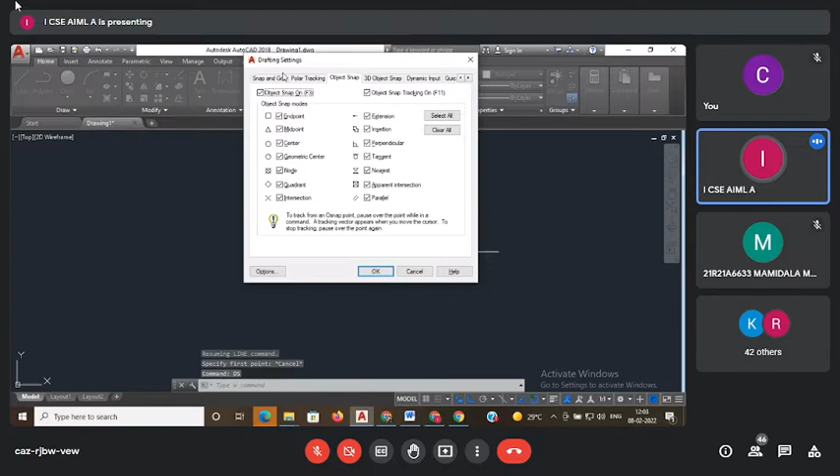ఎంతమంది వచ్చారు? 45 44 మెంబర్స్. ప్రీవియస్ క్లాస్లో ఎంతమంది ఉన్నారు? ఉన్నారా 60?

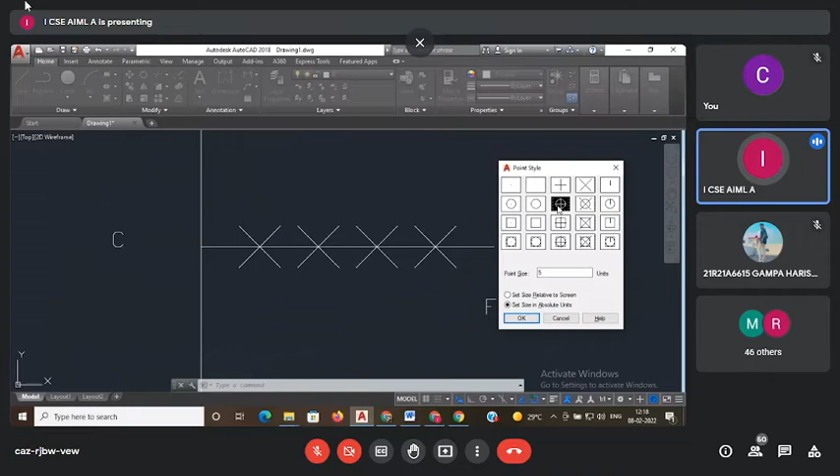Automatically changed. Okay, now I will reduce the size. PD size, enter, I will give 1.

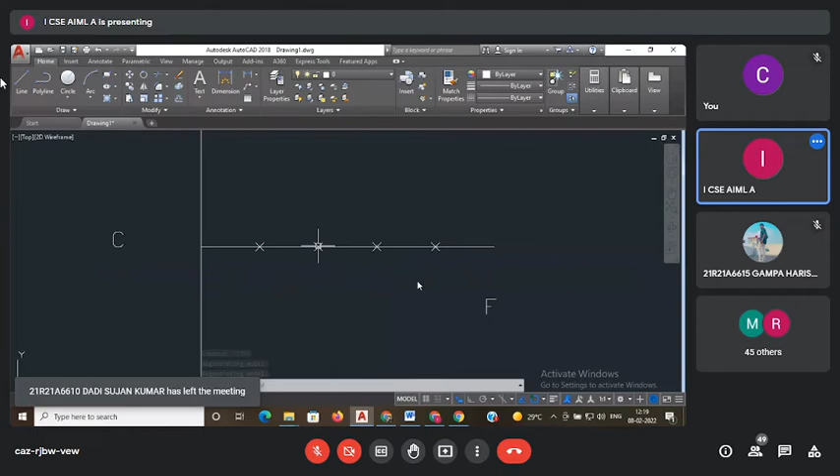Next, P type, go to P type, you go with the cross. Now, if you observe here, you are getting only 4 points: 1, 2, 3, 4. This is also 5, meaning the fifth one is the end point. That's why it won't show any line over here, meaning point, but you have to consider that also.

How do you divide the line into a number of segments? By using the divide command. Select the divide command and select the line which you want to make divisions on, and then give the number of segments based on the eccentricity value.

Then up to this, for ellipse, parabola, hyperbola, everything is the same. Suppose if it is hyperbola or parabola, they won't give any eccentricity value. It's a half, meaning this total is 50, you will get only 1 point at the middle. Okay, so I am doing the same question for the parabola.

What is the eccentricity value for the parabola? Equal to 1, meaning 2 halves. I will go here to the divide command, I will use the divide command. Select the line, and I will go to number of segments. How many segments? Only 2 segments, suppose, 2 points.

PD mode, enter, give value 3. We already had this previously, that's why it is showing like that. Okay, draw one horizontal line, vertical line and horizontal line, use that method.

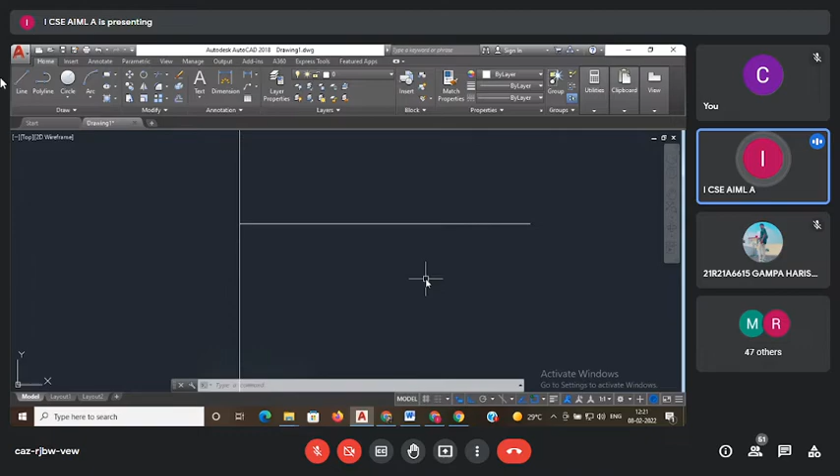Now I want to make it 2 divisions. Why? Because it's a parabola. If it is hyperbola, see here, the eccentricity value is 3 by 2, okay, or 5 by 2. 3 by 2 means again 5 divisions.

You have to go with 5 divisions. But where you have to keep the vertex value, vertex point, that is the main step here. First I will go for divide. Select the line, go for number of segments 5, enter.

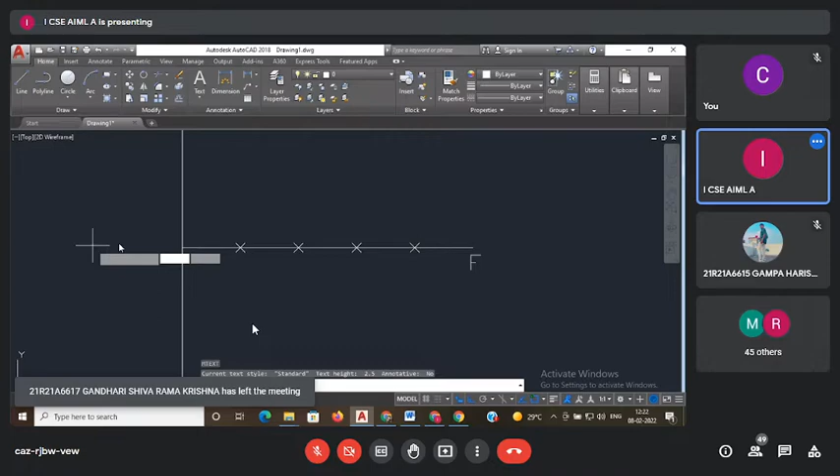Okay, next vertex point. Suppose here I am having F. Okay, here I am having C. This is A. It is B.

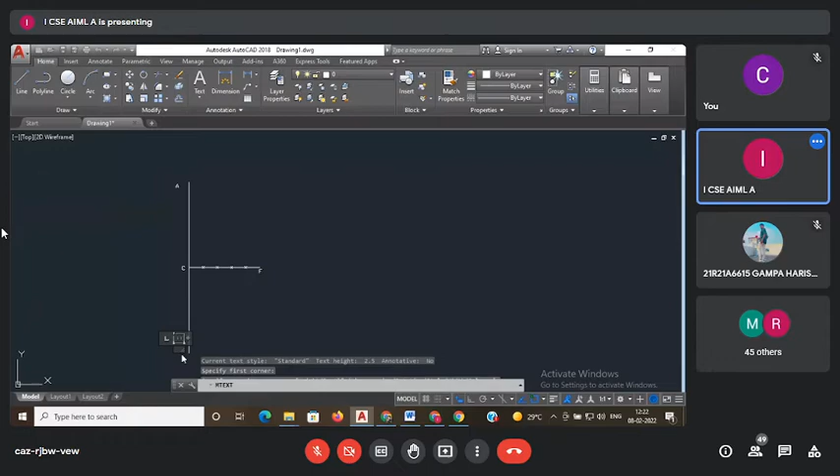Next, I have to make the vertex point here. Suppose if it is ellipse, the value is 2 by 3. Meaning, as I already told you, the formula: eccentricity E is equal to Vf by Vc equal to 2 by 3.

Okay, already I explained that in the class. So here eccentricity E is equal to, now here they have given 2 by 3, nothing but Vf by Vc. Vf by Vc. Okay, already you know the F point, you have to identify the V point. Already you know the C point, and you have to identify the vertex point.

VF means from F, from the focus. How many divisions? 2 divisions. That's why don't forget this. Don't forget this formula, this is the main point, the main key point in our entire diagram. If you miss it, suppose instead of 2 by 3, if you take 3 by 2, it will become hyperbola.

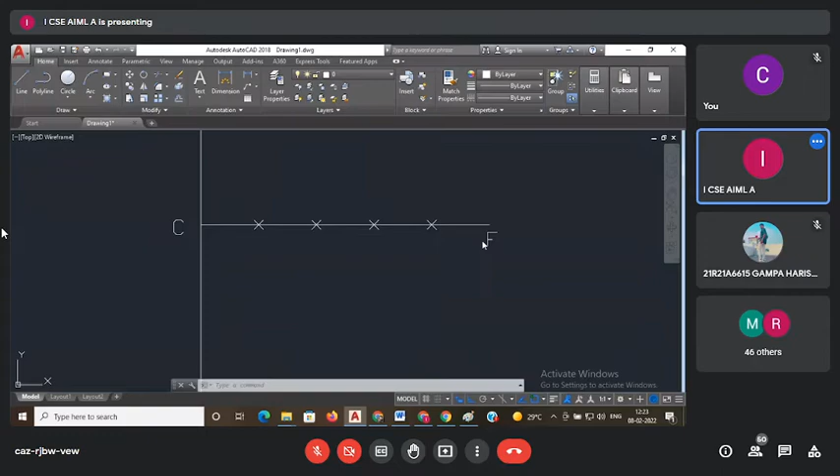Okay, now 2 divisions from the vertex, sorry, from the focus. From the focus, 2 divisions, 1 and 2. Here I am having the vertex point. This is my vertex, okay.

Then suppose if it is hyperbola, you have to take 3 by 2. Meaning 3 means VF. From the F, vertex points are 3 divisions. From F you have to take 1, 2, 3, somewhere here. This is the vertex for the hyperbola.

Now this is an ellipse, that's why 2 by 3. 2 divisions from the focus. 2 by 3, VF by VC. From the F, V has 2 divisions. That's why we have taken 2 divisions.

Okay, then if you made any mistake here, you can easily identify by observing the vertex. Suppose whenever the vertex point is moving towards the directrix, you will get the open curve. Open curve meaning rectangular hyperbola, parabola, ellipse and circle in reverse direction. That's why whenever the vertex is moving towards the focus, you will get a reverse direction: first circle, next ellipse, next parabola, hyperbola, rectangular hyperbola, like that you will get.

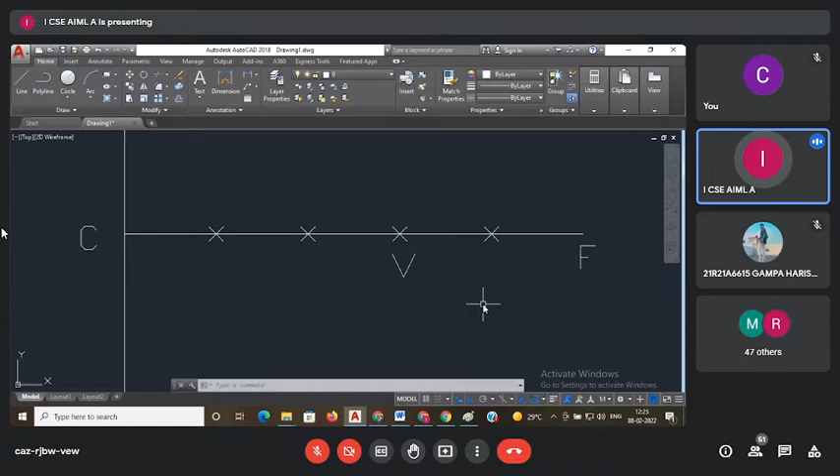That's why by seeing this vertex point location, you can easily identify whether the vertex is towards F or towards the directrix. Suppose if it is towards the directrix, you have to remember only one point: whenever this vertex point moves towards the directrix, you will get the open curve. Just remember this point, that's it.

Okay, now the vertex point is more than half distance towards the F, that's why you will get ellipse or circle. Suppose if the vertex is somewhere here at the middle, you will get exactly parabola. If it is moving towards the directrix, you will get hyperbola, rectangular hyperbola. That's why don't confuse here.

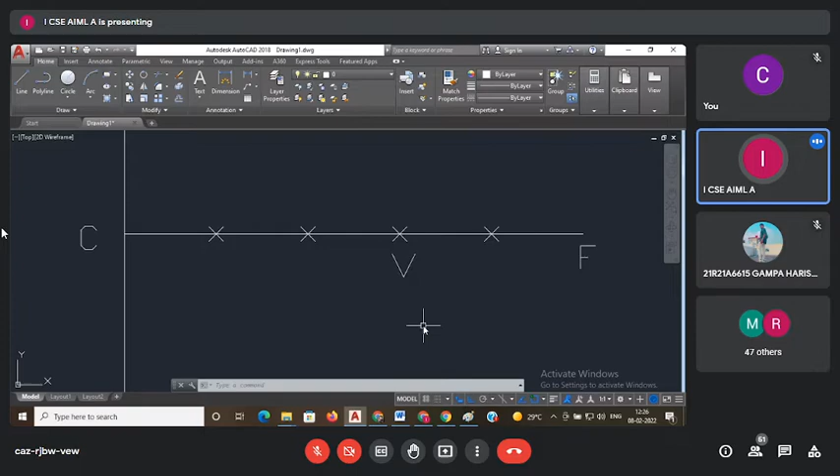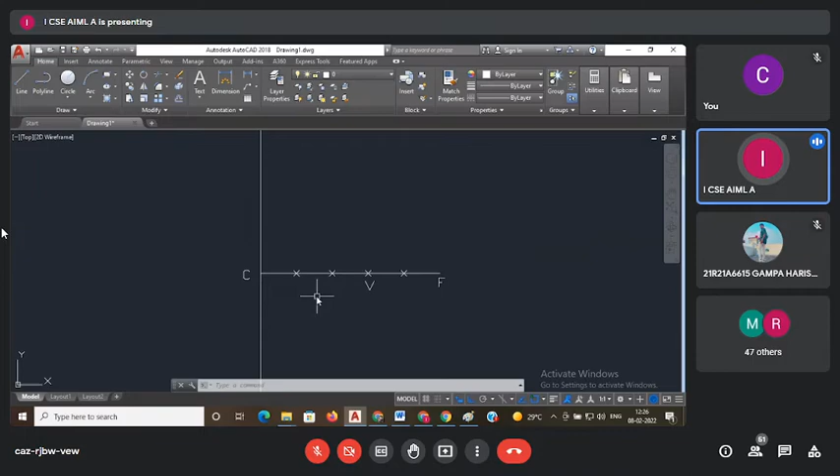Whenever you are mentioning this vertex point, after mentioning it, observe, just go with 2 seconds, that's it. Within 2 seconds you can judge whether the vertex point is near to the F or near to the directrix. Whenever it is near to the directrix, like you will get a vertical line. Directrix, how is it? Vertical line, meaning you will get an open curve. Towards the F, you will get a closed curve.

Okay, now vertex we have shown. After this vertex point, I am explaining here the general method. You can apply this method, these steps, for any kind of problem in ellipse, parabola and hyperbola. Suppose they have given 70 mm or 80 mm or 40 mm, whatever it is. But I have taken, for example, 50 mm and I am doing it. Instead of 50 mm, they may give 70 or 35 or 40, whatever it is.

Okay, next, after finding the vertex point, we have two methods: one is the arc method, one is the circle method.

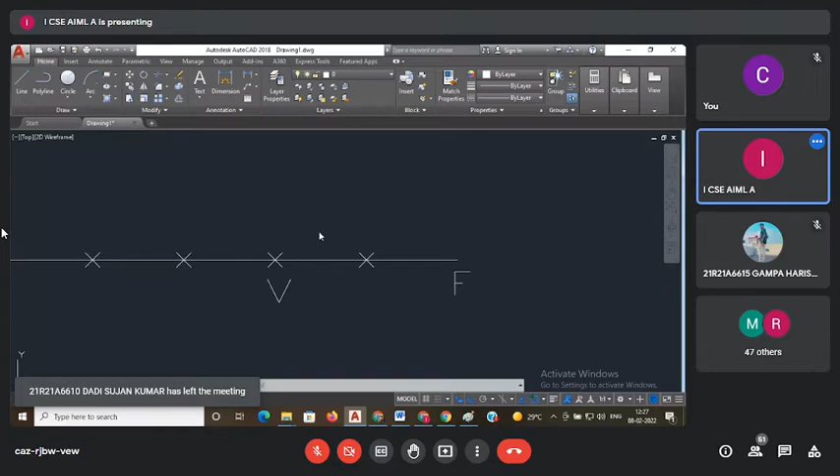First arc method: select the center, start, end. V as a center, VF as a radius, draw one arc. That's one method.

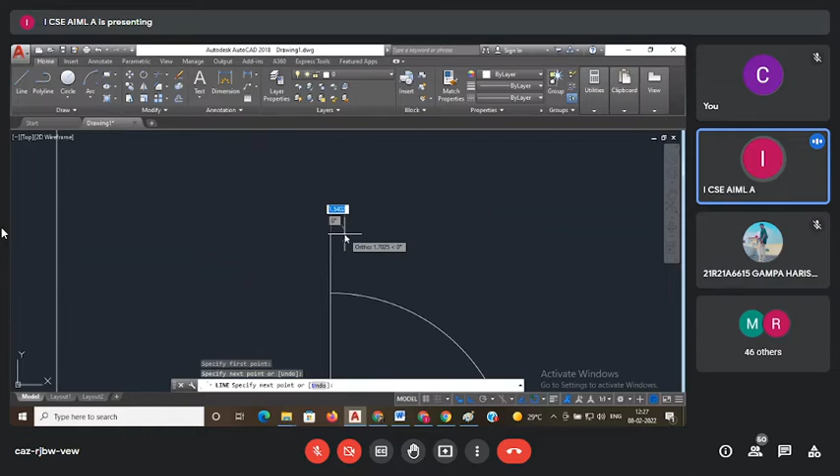Before that, you have to draw a vertical line from the vertex. After finding the vertex, draw the vertical line upward. Then draw an arc with V as center, VF as radius. I observed in the lab that you were drawing the vertical line but not taking the VF radius correctly.

You are taking half of the radius, means 25 mm, or sometimes drawing from V to the second point distance. Don't confuse here. Just follow the steps: after finding the vertex, draw the vertical line upward, then with V as center and VF as radius, draw the arc that will intersect or touch this vertical line.

That intersection is your E point - E, F, B, C, whatever notation you choose. You will get one point. That is the arc method.

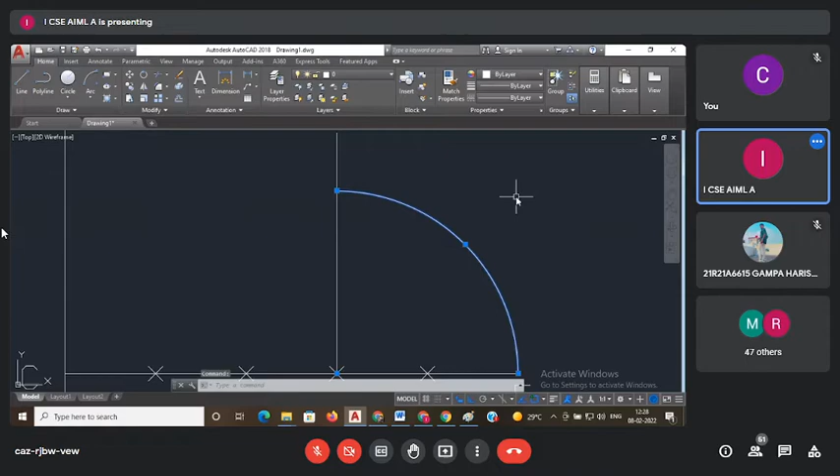Instead of the arc, I can go with the circle method, which is easier. I will select center and radius - V as center, VF as radius - and draw the circle. It will intersect this line. Then I will use the trim command and erase the extra part.

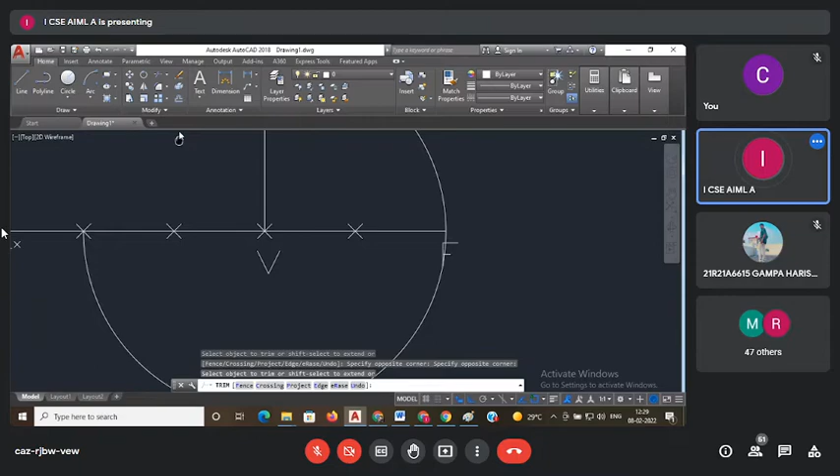This is also one method. But instead of trimming, which requires using one more command, I will directly use the arc method. Draw a vertical line from the vertex, take V as center, VF as radius, and draw an arc. You will get one point here, that is E.

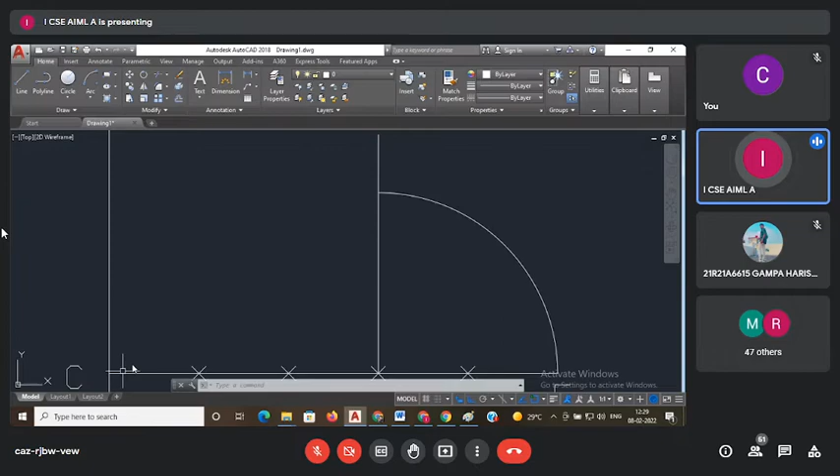From E to C, draw one continuous line - ortho from C to E. You have to draw this line.

Don't measure this angle, no need to measure it. Whenever you draw this inclined line, you can guess by its inclination whether you're going to draw an ellipse, parabola, or hyperbola. Suppose this inclination is increased, like this.

The line will be somewhere here, vertex here, VF is the distance. Whenever the line inclination increases, you automatically get an open curve - you can guess this from the inclination. But don't measure the angle. Just draw the line from C to E. This is your E point.

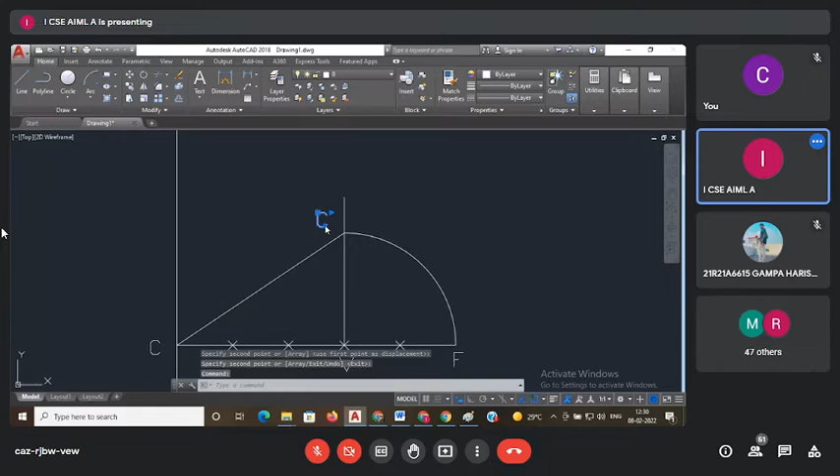Then I want to extend this line. Instead of other methods, select this line, keep your cursor at the end position, and you will get an option called lengthen - without pressing any button on keyboard or mouse, just placing the cursor at the end point. Select lengthen and increase the length up to somewhere here.

We have one more step here, that's why we just lengthen it at this point. Suppose if you're not doing it that way, you could just measure the angle and extend. Instead, select this line and move your cursor to the end point - automatically you'll get two options, one being lengthen. Select lengthen and increase the length, that's it.

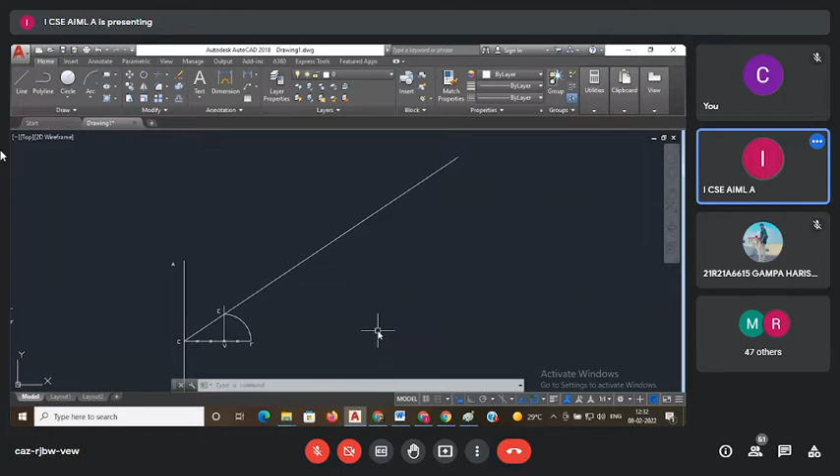Next, I want to draw a 45 degree inclined line from the focus, from F. This is the same mistake many of you made in the practical classes - even when I explained this on the projector, some students took the line from V, the vertex, instead. It's not like that - always from the focus point F, you have to draw the 45 degree inclined line.

This is applicable only for the ellipse case. For the parabola and hyperbola, there's no need to draw this 45 degree inclination line. Why? Tell me anyone - why don't we use this 45 degree inclination method for parabola and hyperbola? Because they give an open curve, so there's no need to find the second vertex.

Why are we drawing this 45 degree line? To identify or find out the second vertex point. Because ellipse is a closed curve, you can draw a rough line and divide that line into 12 or 15 equal parts, and roughly draw the arc.

But if you want exact dimensions, exact end points of the ellipse, first the starting point is here, vertex 1, this is V1. Now V2 means you have to find out the second vertex.

For that purpose only, we are drawing this 45 degree line. Because ellipse is a closed curve, while parabola and hyperbola are open curves. That's why there's no need to follow this for them, just take the number of divisions.

Now I will draw one more line from the focus with a 45 degree inclined line. I will select this F point, move the cursor like this, and take some length. Now it is showing 273 something, okay, keep it, no problem.

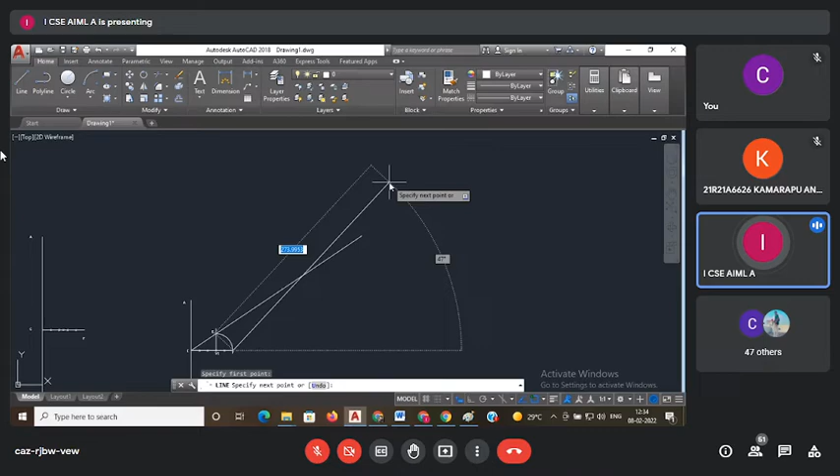Then I want to give the 45 degree inclination. Just press the tab button, don't give any value, just press tab and give the inclination, 45 degrees. Okay, done.

Now I got the intersection point. From this intersection point, I want to draw one vertical line. Between this vertical line and this axis line, from F, draw one line up to here. Then you can trim the excess portion.

Once again, draw the 45 degree inclined line from the focus. Observe clearly, from the focus, not from the vertex. That 45 degree inclined line intersects the CE line somewhere. From that intersection point, you have to draw the vertical line.

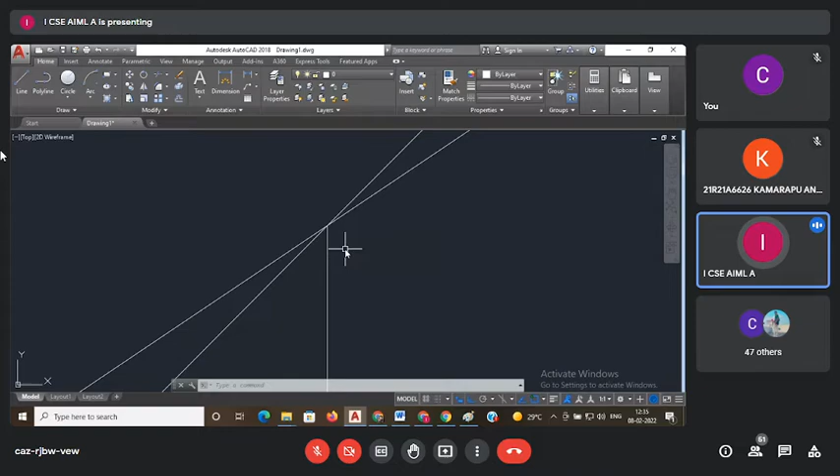You have to be careful whenever selecting the intersection point. Zoom the screen and then select the intersection point, otherwise sometimes it will select somewhere else. Find out the intersection point correctly, then draw the vertical line towards the axis.

Now this is your V2, copy here, this is your V2. Now change this notation to V2. Between this V1 and V2, you will get the ellipse.

Next, what is the next step? You have to divide this F and V2, or V1 and V2. Tell me, which line do I want to divide? V1 to V2 or F to V2? Not F to V2, V1 to V2. Why? Because we will get the ellipse between V1 to V2. That's why we have to divide the V1 V2 line only, not F to V2.

Don't forget, if you divide F to V2, you will still get an ellipse, no problem, but a very small size ellipse, not the original size. Why? Because you are missing this length, the V1 to F length you are missing, that's why you will get the small ellipse.

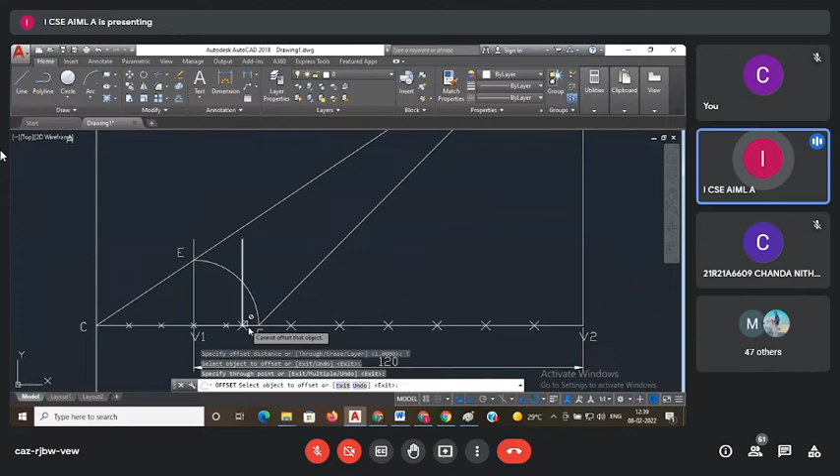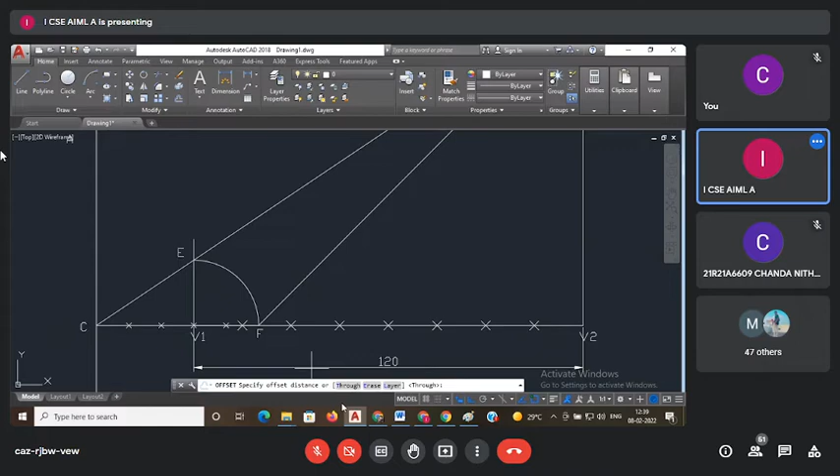One more method we have here is multiple. Go to offset, through, select the through command. After that don't select the line, we have options here. Offset, through — after selecting through, let's select the line. Then you will get the option once again here, multiple. On the command prompt, select multiple. Then place the point: first line, second line, third line.

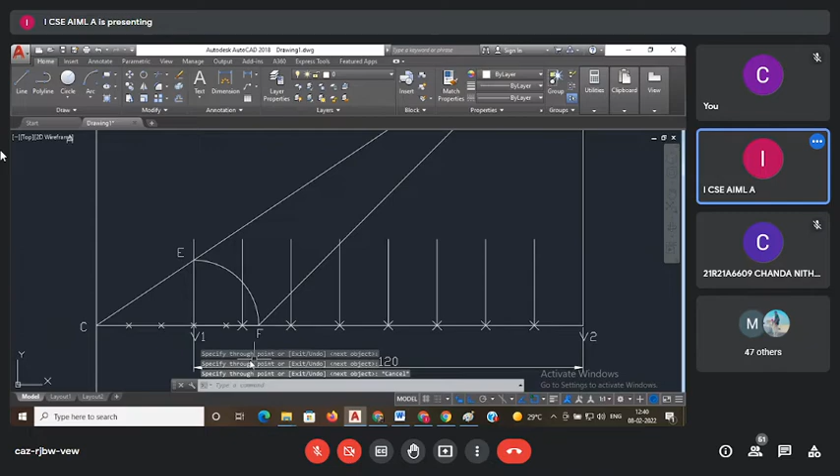But suppose if you find out the distance from point to point, also no problem, you can draw like that also. Now we draw the vertical lines from each division. Now this is your...

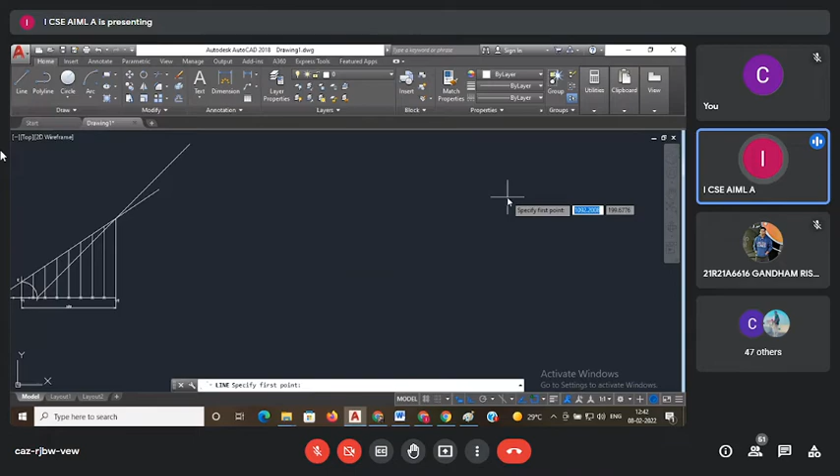Suppose here one line I am having, a vertical line, and here I am having one more horizontal line. If I want to extend this line up to this vertical line, suppose I am drawing one more line somewhere here, I want to extend this line up to this vertical line. Whenever I want to extend it means it should intersect with the boundary line. Suppose I am selecting here extend command — extend, I am selecting the boundary line first, meaning up to where I want to extend, boundary line, press enter. Whenever I move the cursor, automatically it will extend.

But if I move the cursor onto the second line, it won't extend. Why? Because here I don't have the boundary line. Meaning whenever you want to extend the line, it should touch the boundary line. After extending, it should touch the boundary line, then only it will extend. Otherwise it won't extend. This is the extend command.

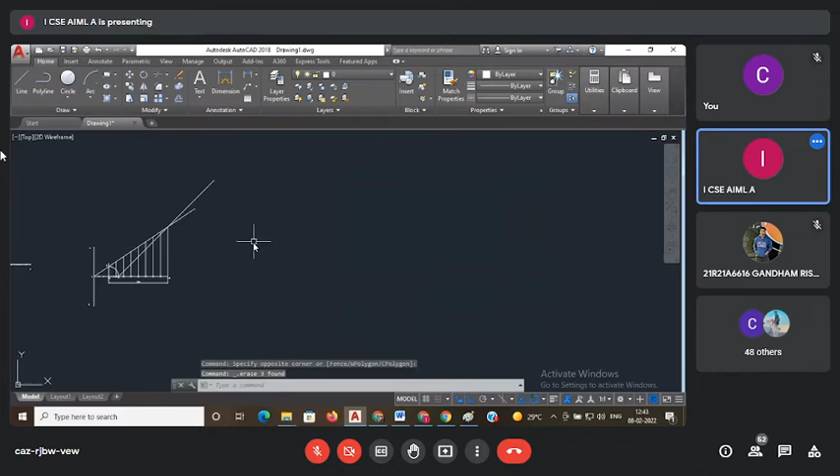Here same, I am using the extend command. I am using this CE as my boundary line. Then I am selecting all the lines. Now this point is 1, 1 dash, 2, 2 dash, 3, 3 dash, 4, 4 dash, like that.

Go for multiple text, take it, single text here. Here is 1, here is 1 dash. Here is 2 dash, 3 dash, here is 3, here is 2. See — 1, 1 dash, 2, 2 dash, 3, 3 dash.

What is the next step? After drawing this, I will go with the circle method or arc method. So first I will explain the arc method, then the circle method. Arc method: center, start, end. First you have to measure the length — this 1, 1 dash length you have to measure.

Before going to select the arc method, you have to identify the length of 1, 1 dash. How much is it? 30. So I will go with the arc method: center, start, end. Center will always be fixed — center is our F, F as a center. Zoom it, F as a center. Then 1, 1 dash as a radius.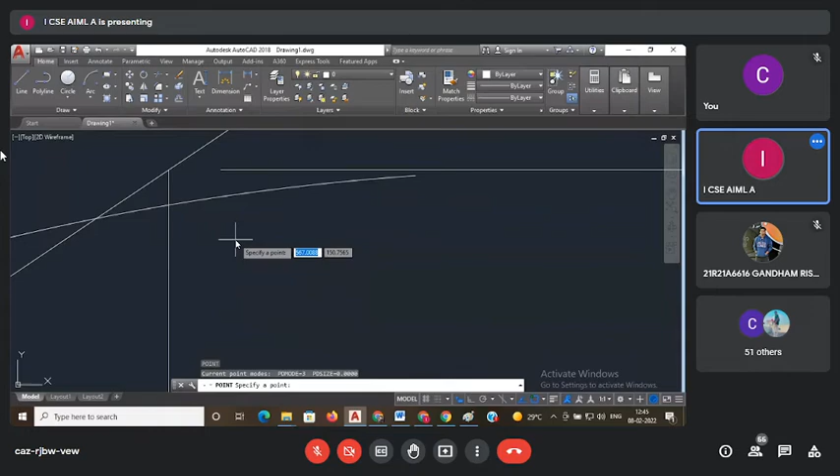Make the point and delete this arc. Or you can keep the arc, no problem. This is the arc method. If you want to select the arc method, you have to measure each and every distance.

Distance means 1, 1-dash distance, 2, 2-dash distance, we can say length, 3, 3-dash length, 2, 2-dash length, 1, 1-dash length, like that. Up to the 8th division, you have to measure the length.

Instead of that, if you go with the circle method, it's very easy. Go with circle and radius method, center and radius method. Now the center is 1, radius is 1-dash. Okay, then I will select the circle.

I will go with the movement. I will shift this center from 1 to F. Now see, exactly I am getting the point. Here already I drew the point. Exactly I am getting the point. Then again, no need to measure the 2, 2-dash length.

Just I will shift this center from F to 2. But what is our procedure? 2, 2-dash as a center. But now it is 1, 1-dash center. Increase this radius up to 2-dash.

Now again change the center from 2 to again F. Now it will intersect somewhere here. Make the point. Okay, next, again shift the center from F to 3. Now it is the third point. Then increase the radius to 3-dash.

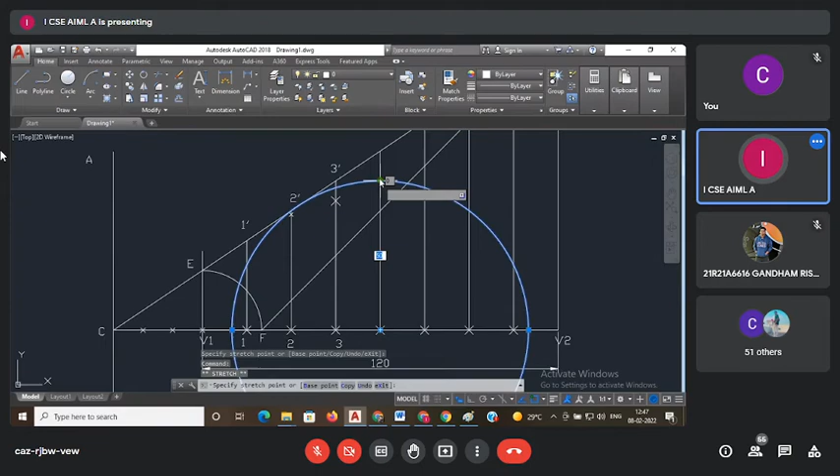Okay, next again shift this center from F to 4. Now increase the size to 4-dash. Next shift the center from 4 to F. Okay, where it is intersecting somewhere here, 4 and 5.

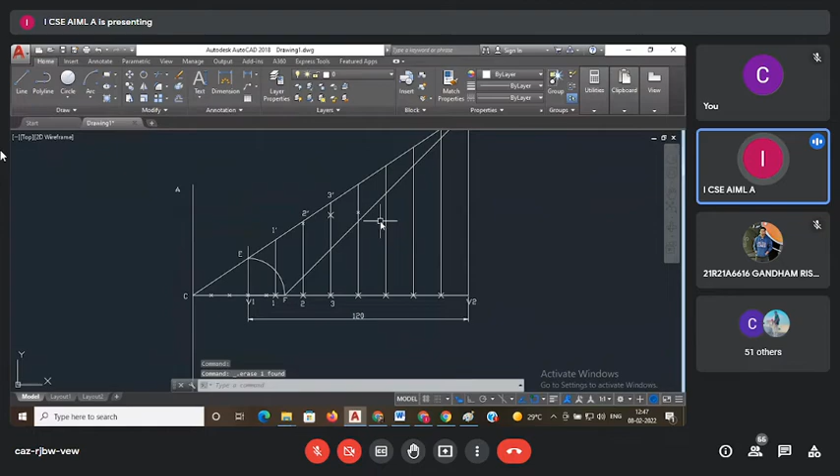Next, why I made it into 8 equal parts - that's why I don't want to measure the 5-dash, 6-dash, 7-dash. Why? Because it's automatically opposite to this half. That's why, up to the 4th point, I will measure it.

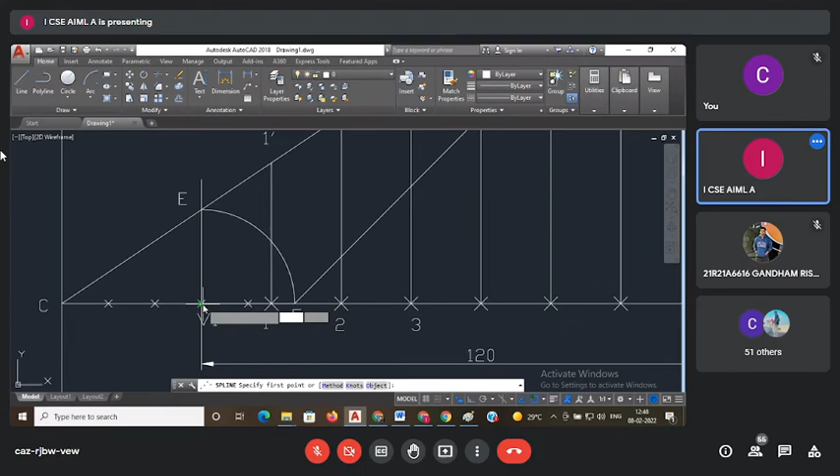Then I will go with a spline curve. Drawing tools, first option, spline fit. Select the spline fit. Start from where? From the vertex, not from the focus. From the vertex. That's why I told you the ellipse starts from V1, ends with V2. I'm starting the curve from V1.

Where is the first point? This is your P1. Next, where is P2? This is your P2. Next, this is your P3. This is your P4. I am keeping the cursor like this and enter. Now I have only 4 curves.

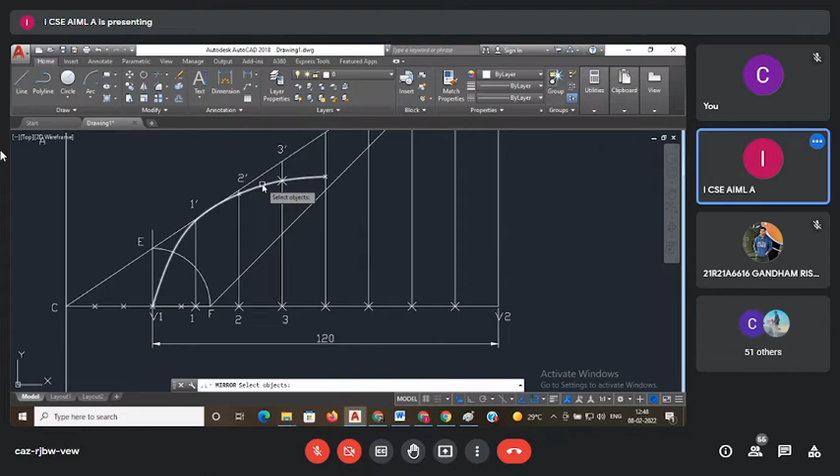Now I will go with the mirror command. Select the mirror command. Select the object, arc, enter, starting point and ending point. Now you got half of the curve. Join these two.

Join. Then if it is not joined, no problem. Select these two, sometimes the options won't work. Select these two and go for mirror again. Select the first point, V1 and V2. Now this is your ellipse.

This is your ellipse. That's why just you have to draw up to 4 lines. Why? Because total 8 divisions we have 4 lines.

Suppose if you take 10 divisions, up to 5 lines, then you can use this arc. You can go for the mirror. Again you can use this total half of the circle, half of the ellipse, and you can complete the total ellipse.

Now you have to show 3 dimensions. One is length from C to F, 50 mm, next one is V1 to V2 distance, and third one is tangent and normal. Tangent and normal.

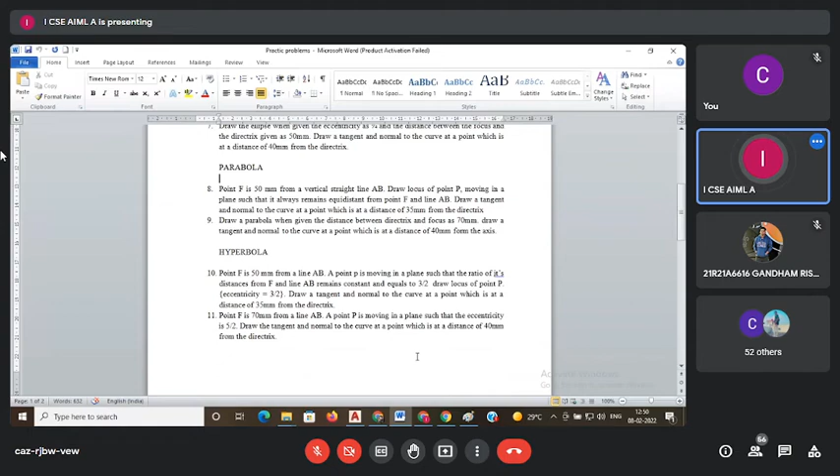How to draw the tangent and normal? Already they have given some values here. For the tangent and normal, they have given 35 mm from the directrix. 35 mm from the directrix means take the distance from C, ortho on 35 mm. Draw one vertical line.

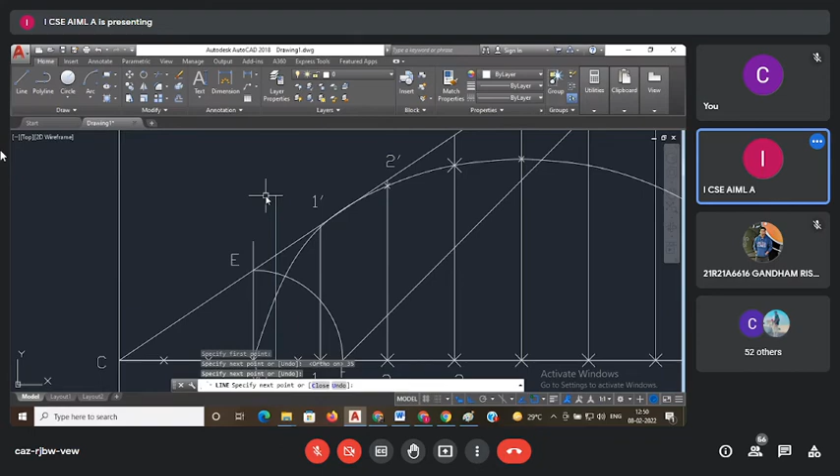Where it is intersecting the ellipse, somewhere here - this is your P point. After that, what you have to do? From P to F you have to join one line. This is your P point. P to F, you have to draw one line.

Then from P to F, after drawing the line, you have to draw the 90 degrees line for this PF. For that, you can use the rotation command, or line also you can use. Select the rotation option.

Select the object, press enter. Specify the base point, go for copy option and give 90. If it is given 90, I think you will get upward direction. Now it is, suppose I will give first 90. Okay, I got downward direction. Then I will extend, meaning lengthen. Just move your cursor here and keep somewhere, sometimes you will get this lengthened.

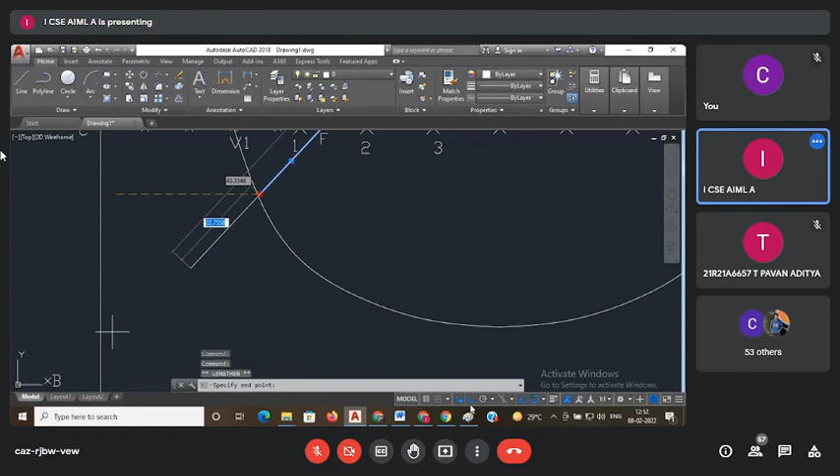Lengthen the line, you will get one more point here. From this point, draw the line towards this intersection point, P. Then select this line, go for lengthen again, and just draw the lengthy line.

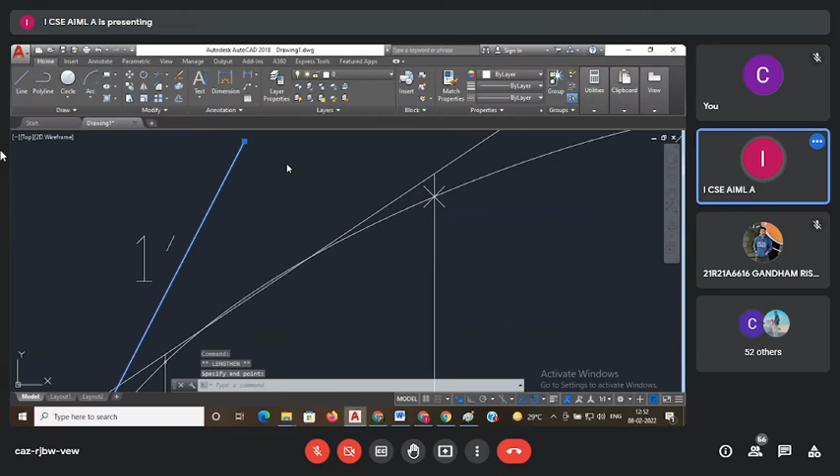Next, again go with the rotation. Select this, go for rotation. Select the base point. Where is the base point on the curve? Here, select the base point, and go for copy and give 90 degrees.

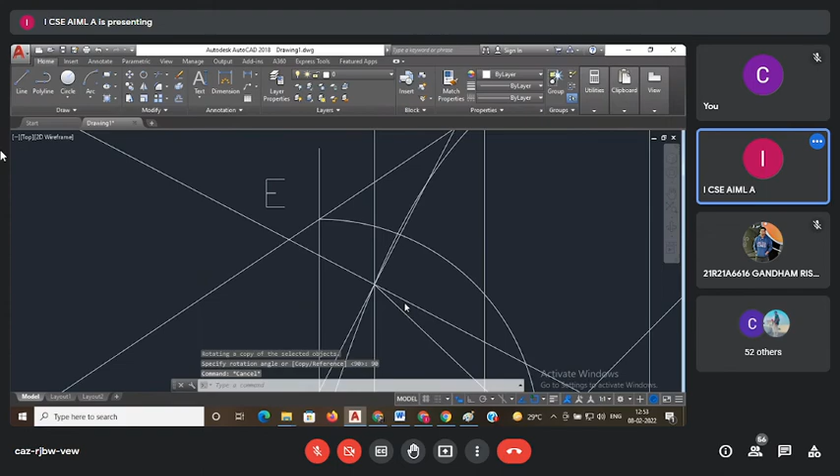Now you got tangent and normal. This is your tangent, this is your tangent, this is your normal. Go with different colors.

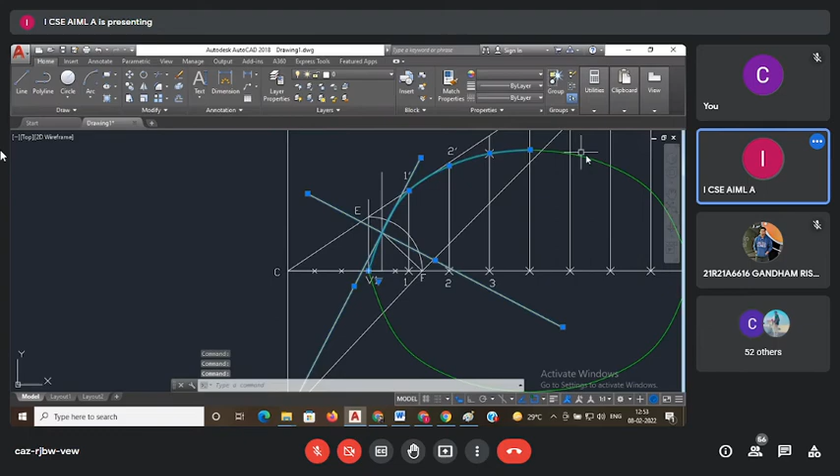Now select the circle here, means ellipse. Go with different color. Next, select tangent and normal and this ellipse. Go with thickness, increase the ByLayer. Go to ByLayer and increase the line width and select this option. So this is your ellipse and tangent and normal.

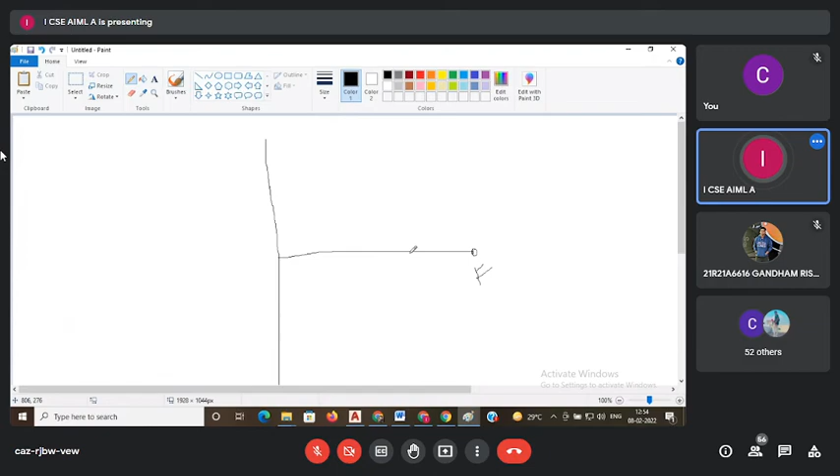Okay, once again I will explain here. First, draw a vertical line, then draw a horizontal line from the midpoint. This F is F. How much distance? 50 mm from the directrix given in the question.

Then divide this CF into equal parts. How many equal parts? E is equal to 2 by 3, means total 2 plus 3, 5 divisions. 1, 2, 3, 4 and 5.

Then eccentricity is equal to VF by VC. From F, V, 2 divisions. From here, 1 and 2, here your vertex. Don't miss this step. Only these steps have some differences in a parabola and hyperbola.

Remaining steps are same. Then draw a vertical line from the vertex, and with V as center, VF as radius, draw the arc. You will get one point E. From C through E, you have to draw one line.

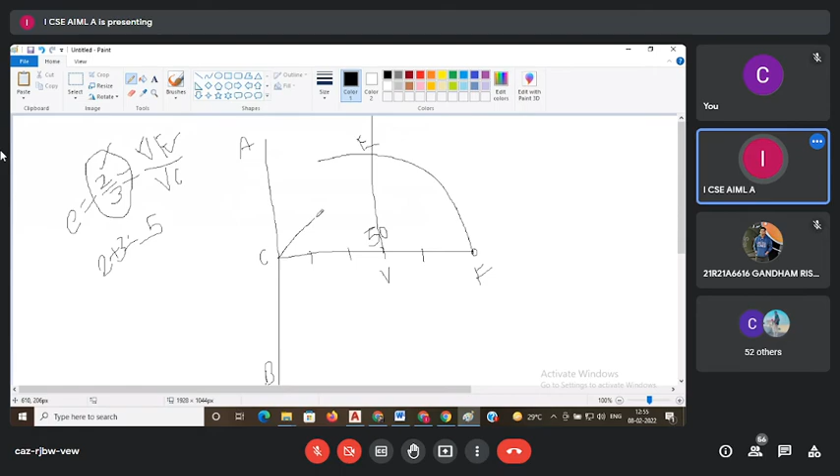Then draw one more line from focus with a 45 degree inclined line. Both will intersect somewhere; from there, draw the vertical line. After that, draw one more line from V1 to V2.

Then divide V1, V2 into a number of segments, or 7, 8, at least 8, so you get equal distances. After dividing, this is your 1, 1 dash, 2, 2 dash, like that. Then 1, 1 dash as radius, F as center, cut the first line. Same with 2, 2 dash as radius, F as center, cut the second line. Then this is your P1, this is your P2.

You have to show the notations. Next, from the vertex, you have to start the curve, not from the focus. This V1, V2, what do they represent? Starting point of the ellipse and ending point of the ellipse. That's why you start from the vertex and P1, P2, P3, P4, like that.

You have to join all the points. At the bottom also, you have to join all the points. You can go for the mirror command.

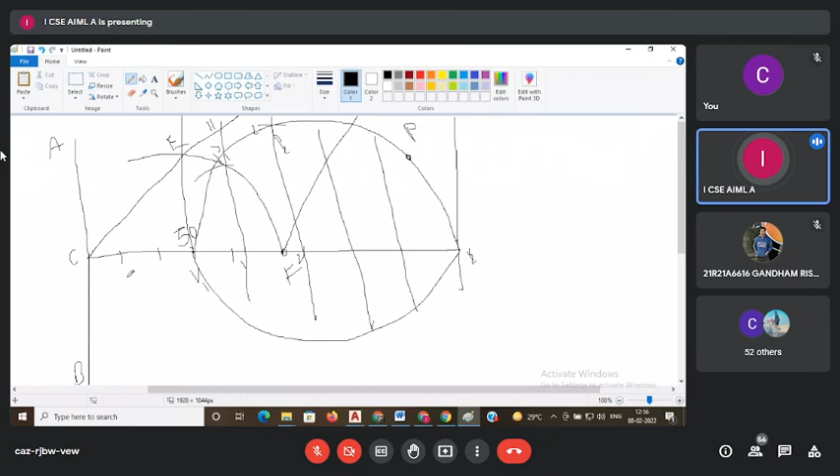Then after this, suppose tangent and normal: you got one point on the curve based on the given value, suppose 35 mm from the baseline. From here, 35, you got this point.

After this, you have to join this PF. After this, for PF, you have to draw one perpendicular line, 90 degrees to this PF.

You will get one point here. From that point, you have to draw one line; that is your normal line. For this line, 90 degrees, so that is your tangent.

This is your normal, this is your normal, this is your tangent. And one more thing here, tangent and normal, in this rough diagram.

That's why the tangent is moving inside the ellipse. It will never move inside the ellipse. If you observe, the tangent always moves on the surface of the ellipse, on the surface, maybe at the top side or bottom side, whatever it is. So if you draw the same tangent normal, the tangent will move like this on the surface. It will touch the surface, that's it, it won't move inside the surface.

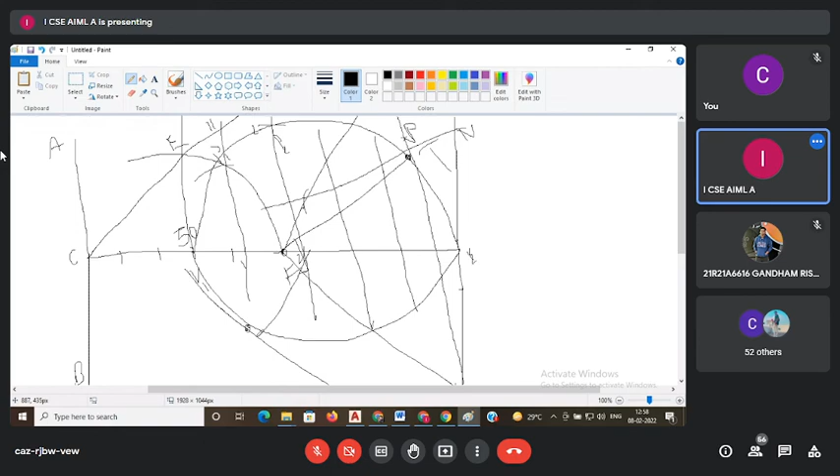And the normal, automatically, is inside the surface. That's why here I am drawing a rough diagram, that's why it is moving inside. It won't move inside; it will always touch, just touch the surface like this. It will touch the surface, then the normal is inside the ellipse. Do you have any doubts here?

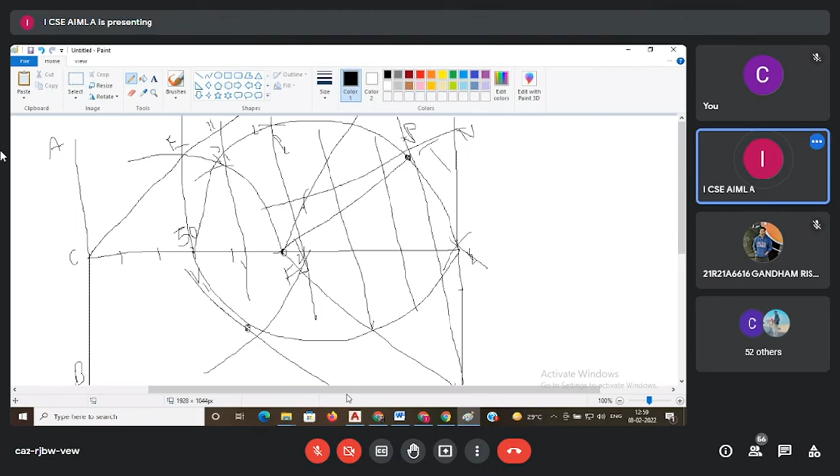This same tangent and normal procedure we use for the parabola and hyperbola also. But instead of V2, what we have to do is just draw from vertex V1, draw 4 or 5 lines. How to draw that 4 or 5 lines?

Equal distances. So the first line from the vertex is 5 mm distance. You maintain that same 5 mm distance for the remaining 4 divisions also. Means from vertex to 1, if it is 5, then 1 to 2 is also 5, 2 to 3 also 5 mm distance, 3 to 4 also 5 mm distance. Equal number of divisions, at least 4 to 5 divisions for the parabola and hyperbola. No need to go more than 5, but at least you have to draw 5 divisions.

Then you get the half portion at the top. Automatically you can use the mirror command to draw the half portion at the bottom. Same procedure - just draw a vertical line and a horizontal line from the center point.

Suppose it is 50. Then I will go for a vertical line from the midpoint of this line. This is the vertex line - this is my vertex for the parabola, this is my focus, this is the center point. Then I will go with the arc method.

Center is my vertex, VF as a radius, I will draw one arc. Center, then I will draw one line from C to E. I will select the line.

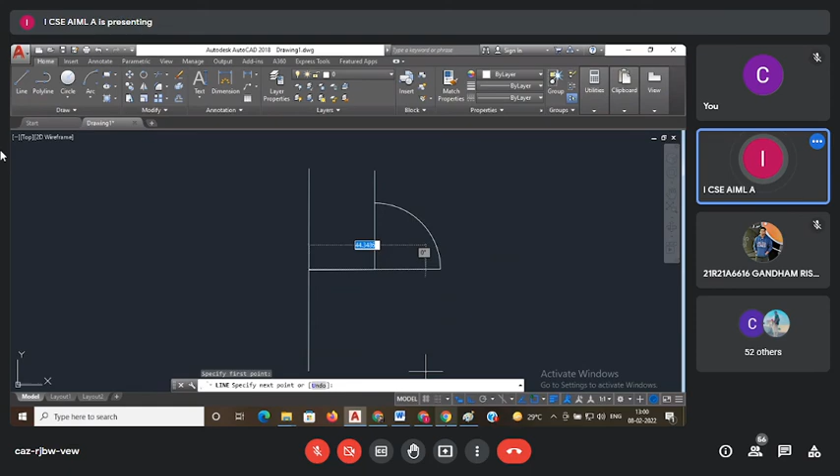Ortho of C to E, and I will extend this line - I will lengthen it up to some extent, up to here. Then I will draw one rough line from V.

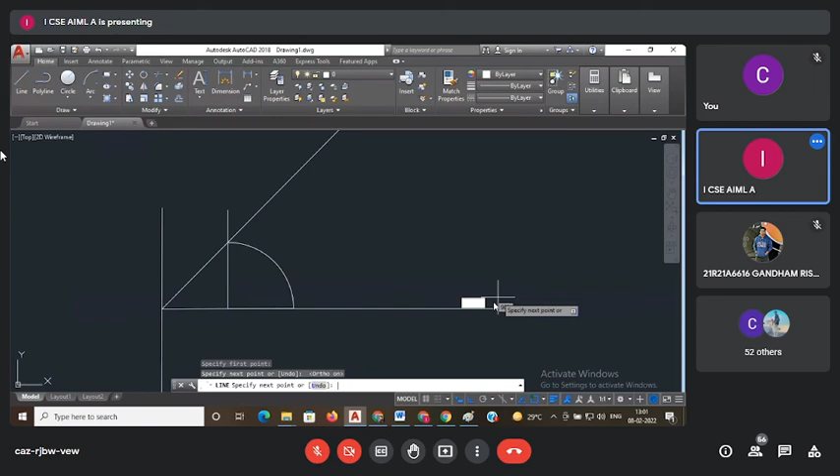Then I will go with the divisions - instead of that, I will go with the offset command. Select offset, instead of through, give the distance 10 mm. Enter, select the line and move here. Select the line, move here. Select the line and move. At least 5 divisions: 1, 2, 3, 4, 5.

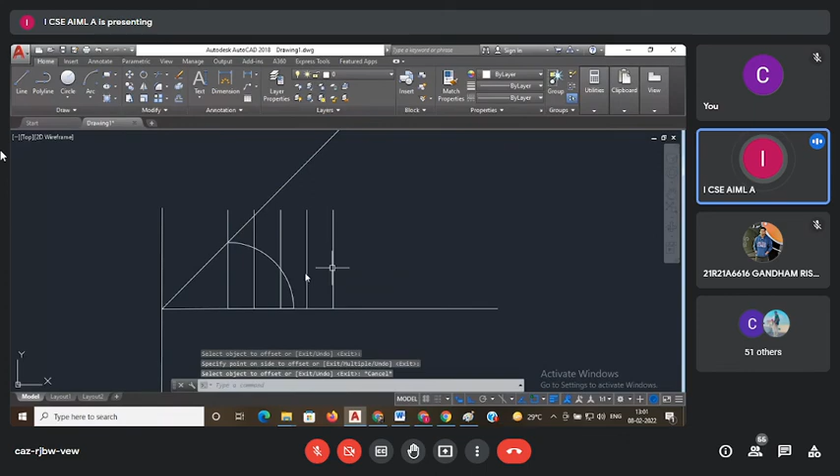Then go for extend. Extend, enter - this is my extension line. Enter, and I will select all the lines.

Now the procedure: 1-dash-2-dash-3-dash, same 1 as radius, F as center, cut the first line. You will get the arc from the vertex. This is my vertex, and the first arc is somewhere here, and here, next here, next here. I will close it.

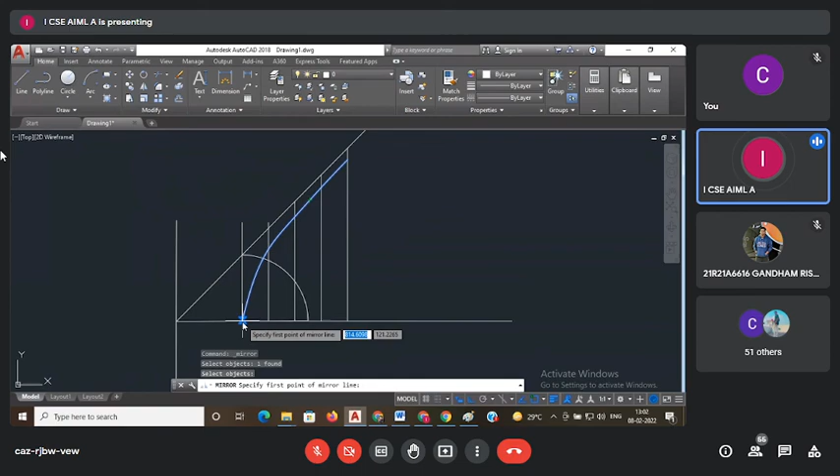Now I will go for the mirror option. Select the mirror command, press enter. Starting point here and ending point here. Now I got the parabola.

Just draw 4 or 5 divisions - no need to measure the distance, measure the length. Equal divisions - see how easily I can draw it. But I have to go with the dimensions. For the hyperbola also it's the same.

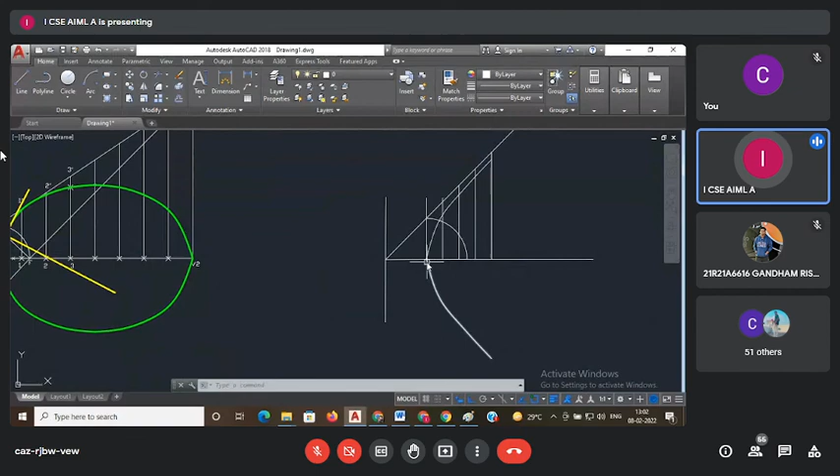For the hyperbola, this vertex point will move towards the directrix. If you observe here, the vertex is near the focus in our ellipse, but here the vertex is at the middle. For the hyperbola, the vertex moves towards the directrix, then the arc will open. Ellipse is a closed curve, while parabola and hyperbola are open curves. How will you identify these open curves? Whenever the vertex is moving towards the directrix, you will get open curves. If you have any doubts, you can ask.

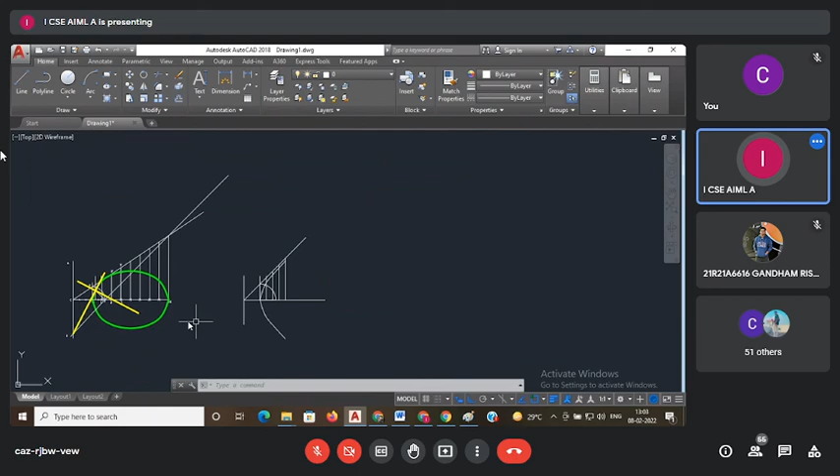Now we have finished ellipse, parabola, and hyperbola. Everything is the same - tangent and normal procedure is also the same. Please be online.